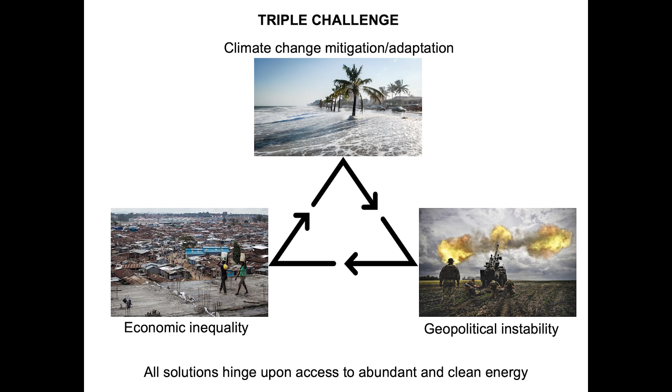But first, a big step back, let's look at the big picture. If I were to run a survey in this room about the three most compelling challenges we're facing as humankind, I'm pretty sure a vast majority would agree: we are facing a crisis in climate change, both mitigation and adaptation; we're facing major geopolitical instability and economic inequality. And the key to the solution of all these challenges is energy.

Access to energy, abundant energy, can defuse competition for resources and therefore defuse geopolitical instability. The use of clean energy is going to displace a lot of emissions, which helps with climate change. And access to energy also helps with providing economic opportunities.

If you look at the history of energy generation and use, going all the way back to Roman times in my native country of Italy, the energy sources, in this case a water mill, and the energy users, in this case the production of flour and olive oil, were always co-located. That has always been the economically most efficient way to run production activities.

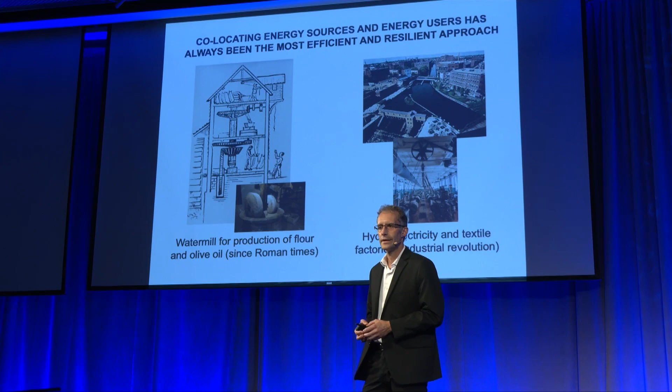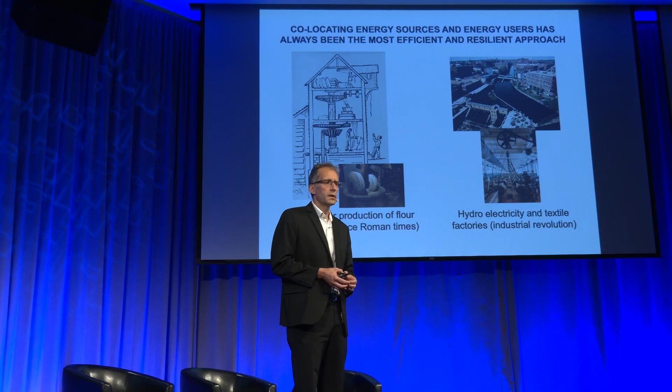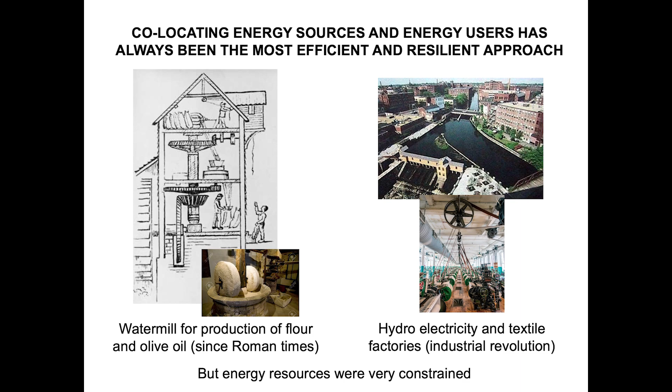Fast forward 1900 years, at the dawn of the Industrial Revolution, you see a similar phenomenon: the emergence of clusters of production activities, and therefore cities, along water streams because of access to hydropower. The problem with this traditional approach is that energy resources were very constrained because you were basically forced to be next to a water stream.

So in a way, you could look at the history of the past 200 years as far as energy is concerned as the evolution of a system that has become more interconnected and larger, to basically access energy everywhere and anywhere and then use it elsewhere.

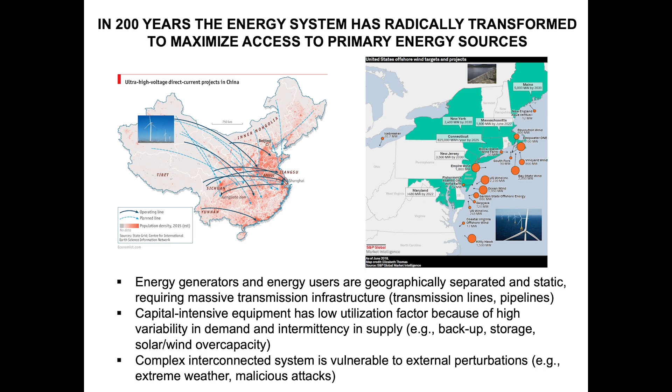The problem with this new approach is that you have energy generation and energy users that are geographically separated and static. They require massive transmission infrastructure—for the electric grid, transmission lines; for hydrocarbons, pipelines. Very capital intensive equipment has low utilization factor because of high variability in demand and intermittency in supply.

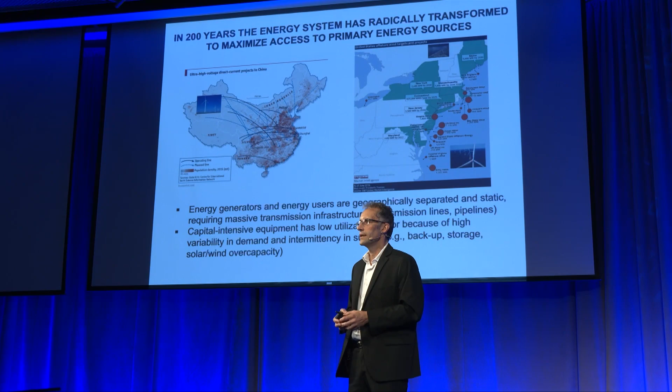If you think about the average utilization for solar and wind, or the backup that goes with it, it's usually pretty low. And then last but not least, these complex interconnected systems are almost inherently vulnerable to external perturbations. This could be either extreme events—for example, here we get the occasional polar vortex which takes out the grid for a couple of days—or malicious attacks of terrorism or even war.

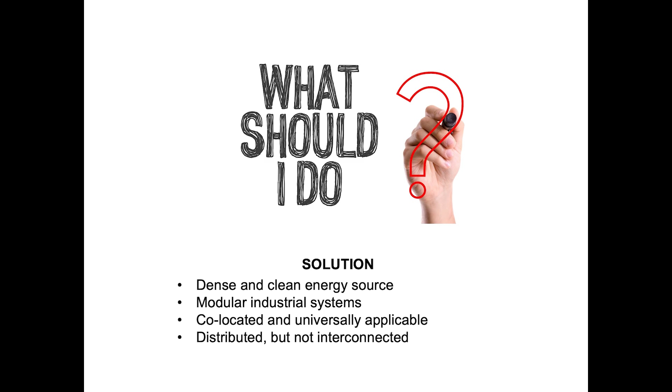So what is the solution? I would propose that the solution is a dense and clean energy source coupled with modular industrial systems—I'll tell you what those are in a minute—that are co-located but universally applicable. Therefore, you realize a system that is distributed but not interconnected, so it doesn't have the vulnerabilities I just described.

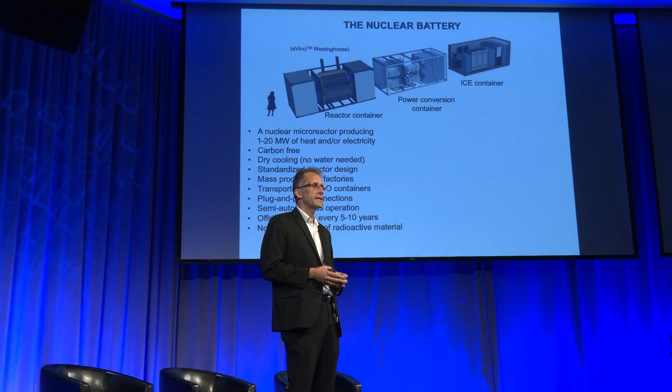Okay, so there are two players in this drama that I'm going to introduce one at a time. The first is the energy source with the right features, and that's what we call a nuclear battery. So what is a nuclear battery? It's a small nuclear reactor, a microreactor, producing between 1 and 20 megawatts of heat and/or electricity.

If you're even vaguely familiar with traditional nuclear power, they tend to be much larger plants, on the order of a gigawatt, and tend to be connected to the grid. This is different. It is still carbon-free because that's the nature of nuclear. It does not require water for cooling, so again it decouples you from proximity to bodies of water.

It is a fully standardized reactor or system design. It is expected to be mass-produced in factories—high productivity environments, as opposed to construction sites, which are typically lower productivity environments. It is transportable, as you can see in the image here, in two or three standard containers depending on the design. So it literally has the potential to be a plug-and-play energy source.

It could take on the order of days to weeks from the time these machines arrive at the site to the time customers or users actually start to get the energy they need. For economic reasons, you cannot afford to have a large cadre of operators on site, so they're being designed to be autonomous or semi-autonomous, with remote monitoring—not necessarily remote control, because of cybersecurity issues.

And then interestingly, this being nuclear reactors, their energy density is very high. They can provide that energy and or electricity for say 5 to 10 years, again it depends on the design and the use case, without any refueling.

At the end of that period, you do need to refuel them, and here comes the next innovation. Instead of refueling them on site, you ship this nuclear battery to a central facility where it's opened up, defueled, refueled, refurbished, and then either sent back to the same site or sent to a different site.

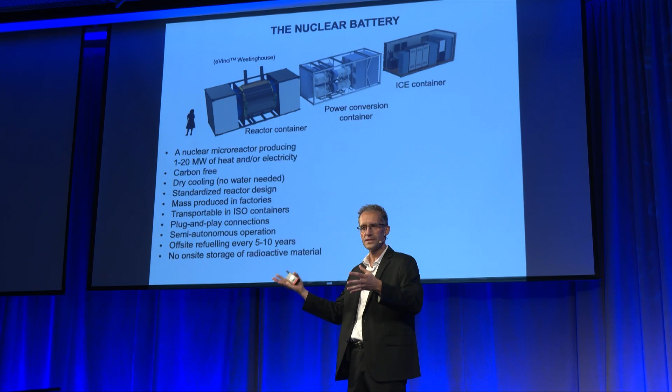Part of the reason why we call these batteries is because what we have in mind is AA, AAA, D batteries, which are all interchangeable. The customer doesn't care if you're getting unit A, B, or C, as long as it's compatible with their energy use, it works.

An implication of this off-site refueling is that there is no need for handling and storing radioactive material at the site. And again, this is certainly good for social acceptance.

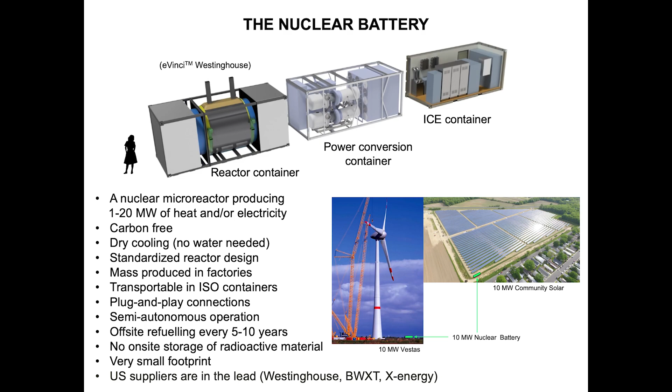Nuclear energy tends to be very, very dense. And so here you see, or maybe you can't see, that little green rectangle on this slide is roughly the size of a 10 megawatt nuclear battery. And that's how it would compare to a nominal 10 megawatt either solar field or wind turbines.

And then last but not least, there is a lot of excitement in the West, in particular in the United States, because unlike the larger plants for which the center of gravity of the industry has really shifted towards East Asia, US suppliers are in the lead. So you might be familiar with some of these companies, Westinghouse, BWXT, X-Energy, et cetera.

So that's the first technology. The second key technology that enables this potential transformation of the economy is what we call advanced industrial production.

Any process or production technology that can be miniaturized, modularized, and mobilized is what we refer to as advanced industrial production. It allows for deployment in increments, and I will show you in a couple of slides what that does in terms of cash flow and economic viability.

And once again, it has the potential to basically be a plug-and-play approach. Some examples are shown here with their more traditional, more monolithic counterparts.

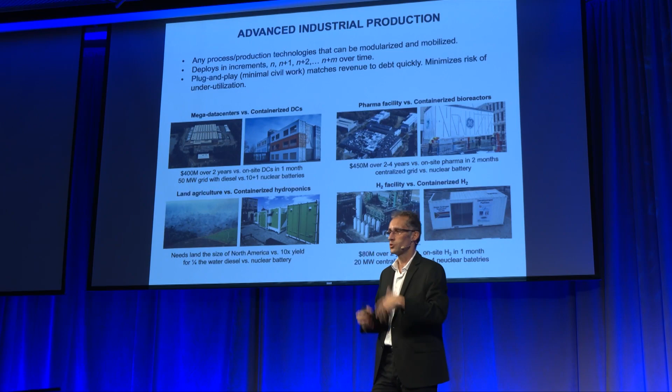So the first one on the left there is a data center. The one on the very left is a traditional mega data center. It might require hundreds of megawatts. It takes several years to build, and it costs several $100 million.

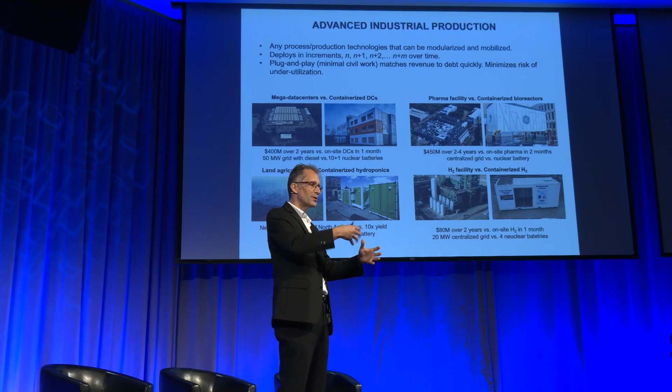And what you have immediately to the right of it is a modularized, containerized, and mobilized data center, which of course does not have the same power, so you need to stack them up and deploy them in increments. But it also requires a lot less energy to run, and it can be deployed quicker.

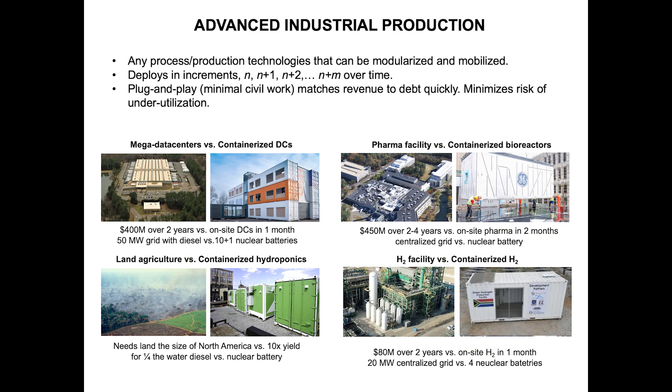Other examples that you see here are pharmaceutical facilities. Even agriculture can be containerized. It requires a lot of energy, again, so you need an energy source there. And then hydrogen, which is very important for decarbonizing the transportation system.

So when you put these two technologies together, nuclear battery plus advanced industrial production, you have what I would call a potential game changer. The concept is shown here for a completely hypothetical site.

We have focused on states that are particularly suffering during this energy transition because they were heavily based on hydrocarbons, and now they're losing that economic power. So this could be, for example, a site in Wyoming. There are a lot of mining sites, so you have access to raw materials.

The idea here is to deploy one or more of these nuclear batteries at that site. And what do you do with it? Well, nuclear batteries produce electricity and heat, and you can use both energy streams for useful things.

With electricity, you can actually do electric mining, which would decarbonize the mining operations themselves. And with both heat and electricity, in this case, if you have an iron mine and you produce iron ore, you can actually produce steel with new processes like molten oxide electrolysis and direct current sintering. And so what you have now is truly carbon-free steel in some form.

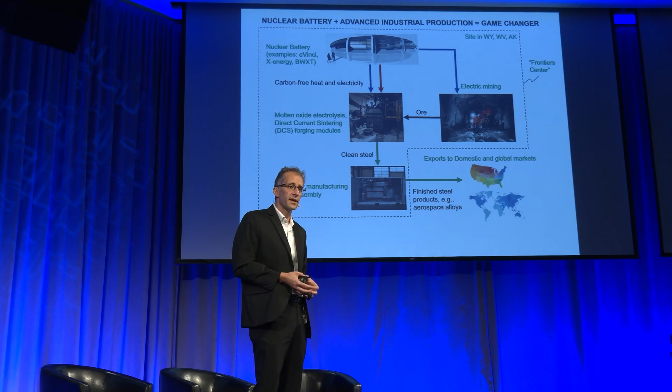It could be rods, it could be plates, but you don't stop there. You can co-locate at that site also manufacturing and assembly facilities, which would also be powered by the nuclear batteries. And then what you get at the other end of this process is the finished product.

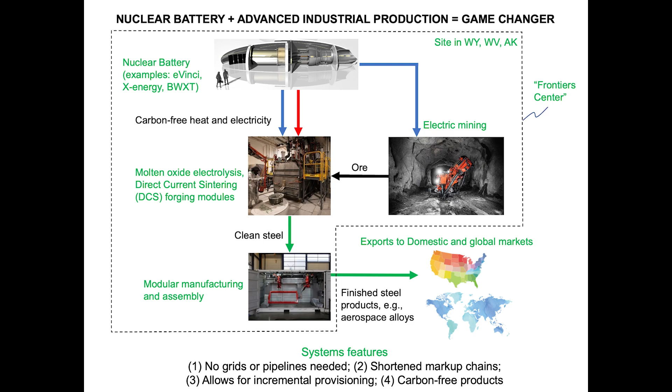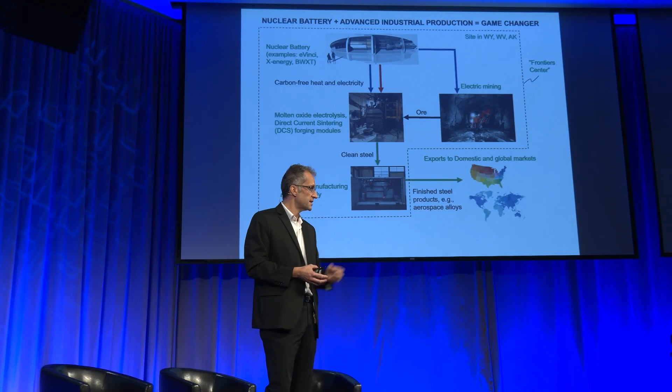And so, as I'll show you in the next slide, the economic value of that finished product is much higher than if you were to sell commodity steel to the market. The features of these systems are that you don't need grid or pipeline infrastructure.

You have shortened markup chains because you have fewer middlemen to pay along the process of going from raw material to finished product. It allows for incremental provisioning—I'll define what that means in the next slide and show you its economic value. And finally, you can say with a straight face that the finished products coming out of this system are carbon-free because the whole system is powered by a carbon-free energy source.

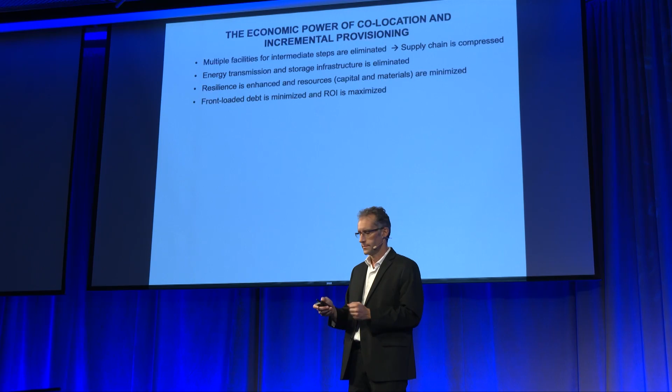So this business of co-location and incremental provisioning—what do we mean by that? We mean that you co-locate the energy source with advanced modular or advanced industrial production. But further, it also means you do that in smaller increments. Instead of spending a lot of words here, let me show you this plot.

There are three curves here. The top curve shows a nominal demand factor for a particular alloy of steel. In this case, to prove the point, we pick something that's essentially a commodity, so the margins in principle would not be particularly high. This sells for about $800 per ton.

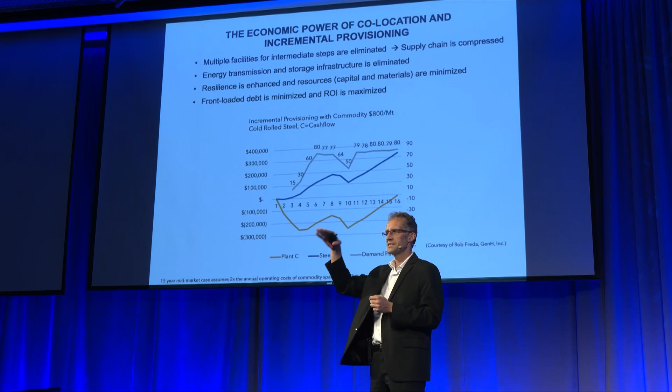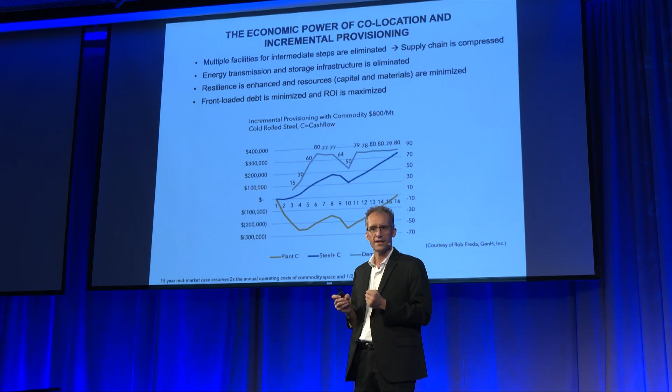That top gray curve shows a ramp up, then steady, then maybe some economic crisis so demand softens a bit, and then it goes back up again. The other two curves compare the cash flow for the two approaches: one, this co-location of nuclear batteries with advanced modular production, and the other, the more traditional approach where you deploy a larger plant up front, anticipating a certain capacity or demand over the years, then try to recover that investment over time.

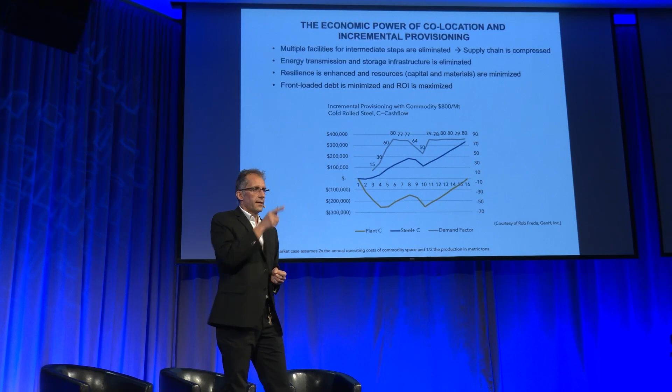On the x-axis here is time, in years. Focus first on the orange curve at the bottom. Not surprisingly, you have a big investment up front, so your cash flow becomes negative very quickly—you're accumulating debt, essentially. Then you start making stuff and selling it, so it goes up a little bit. But there's that dip in demand because some economic crisis has occurred, so you go down again. Then finally, if demand is stable, you go up and reemerge cash positive after about 14 to 16 years.

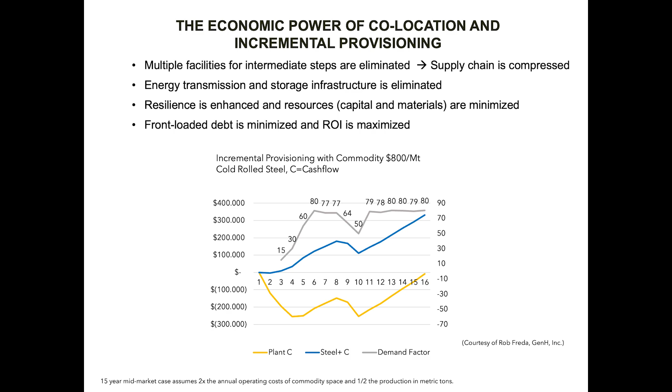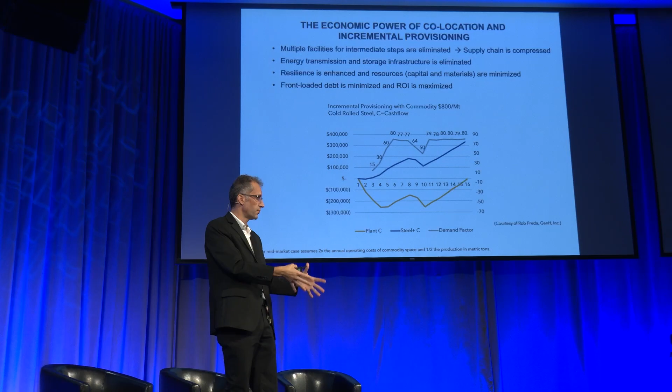Now compare that to blue, the approach we are advocating for. You can see the cash flow is always positive. In reality, if I zoomed in on year one of the project, you'd see that in the very first few months it would go negative, because of course you need to put up some capital at the very beginning, even for that smaller system. So needless to say, this is quite attractive from an economic point of view.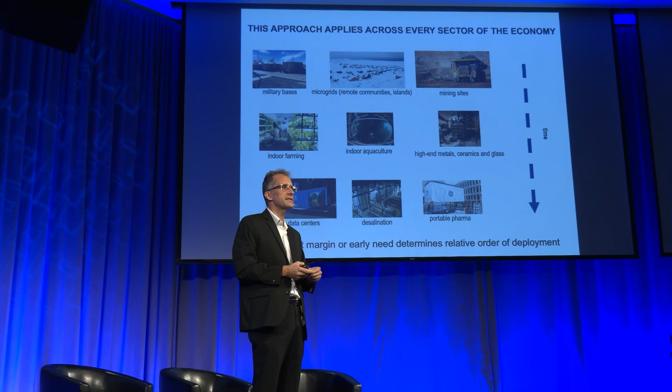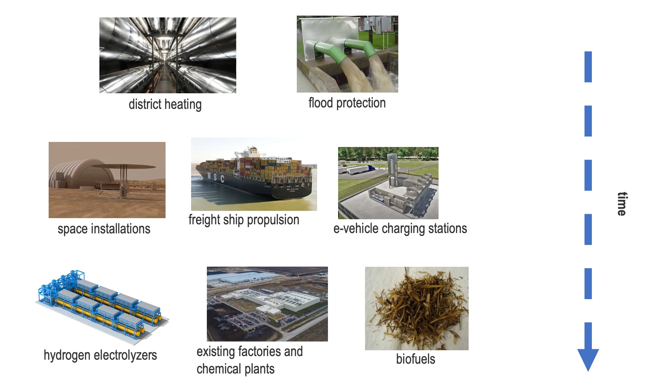Things like military bases, microgrids, mining sites, indoor aquaculture, farming, data centers, and the list goes on. You could do district heating, flood protection, running pumps for coastal communities. A little more futuristic, you could power space bases, even provide propulsion to ships, EV charging stations, biofuels. Here you're starting to get into more commodity-like markets, so probably it's not where you want to start—you'll go there a little later.

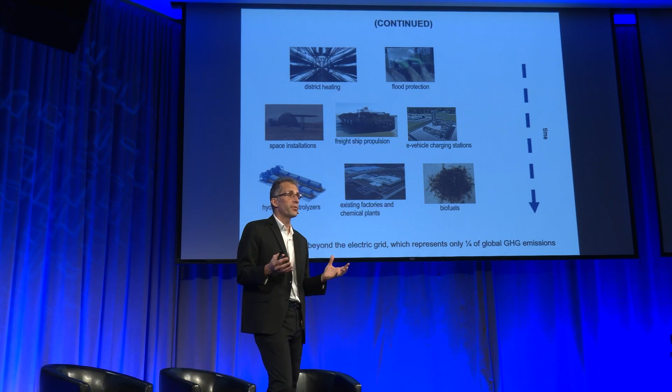Why is this important? If you're strictly thinking about climate change and displacing emissions, there's a disproportionate amount of interest at the moment in decarbonizing the grid. Well, guess what? The grid, once perfectly decarbonized, is only 25% of emissions. I'm aware a lot of people think we can electrify everything, but a lot of sectors cannot be electrified—it's never going to be feasible technically or economically attractive. So this is the value proposition: you could apply this approach across every sector of the economy.